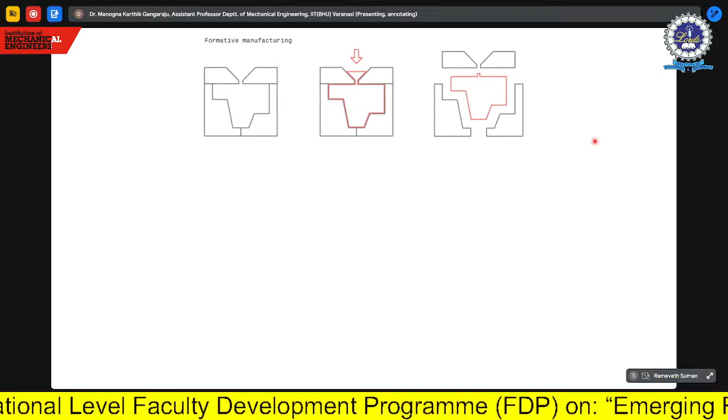This is what I am trying to say. This is formative manufacturing, like simple casting. You basically have a pattern, and that pattern will be the shape of the component you wanted. Then you melt your material and fill this pattern with that material because it is in a liquid state. This material will solidify and then you will have the final component. This is formative manufacturing, which is like casting.

Then you have subtractive manufacturing. If you wanted this shape, you can start with a block like this and then machine wherever it is required, and then you end up with this particular shape. The main disadvantage with this process is you are wasting all this material. You started with this block, removed all this material, and this is kind of subtracting material to achieve this particular component.

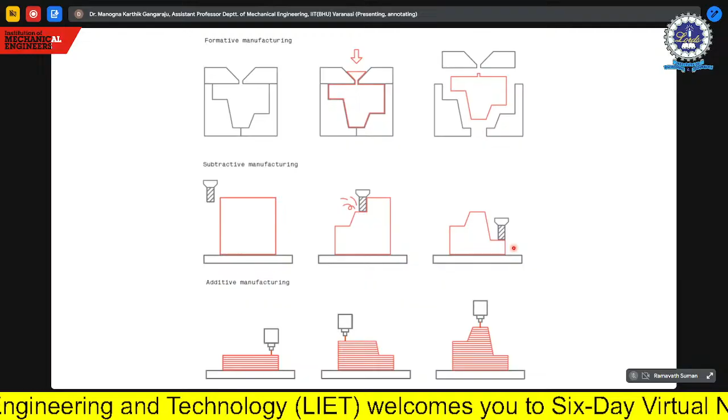And then here is additive manufacturing. If you wanted this shape, wherever material is required, you only deposit there. In this particular region you need material, so you only deposit there, and then till here you need material and you only deposit there, and then you want material only here, so you deposit here. We are actually developing this component by layer material addition at specific locations wherever material is required.

With this, you are able to develop complex shapes, and the main advantage with this technology is you don't have separate tooling. In casting, you need to make this mold, this pattern, and all the things required for casting has to be done. These are all separate tooling, not part of your component. This is a tool, this is a tool, this is your component, and to make it you need all these tools. Similarly in subtractive manufacturing, you need some machining cutting tool to make this, so there is also a tool involved.

But in additive manufacturing, you only require a deposition head. You are depositing material wherever it is required, and this is actually helping you fabricate complex near net shaped parts. If I wanted another shape other than this, I would need to make these tools separately, a different tool set for each shape I wanted to make.

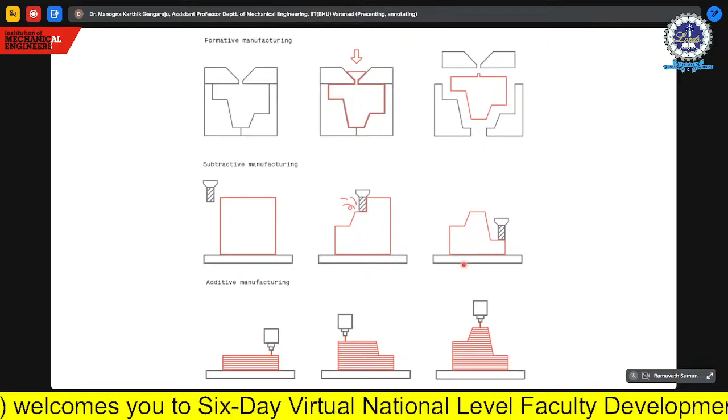Even in subtractive manufacturing, there are some things you can do with milling, some things with turning, some with grinding, some with super finishing and things like that. So different operations, different tooling.

But in additive manufacturing, it is agreed upon that you can make near net shaped components, so separate tooling or machining is not required. But the major disadvantage of this technology is you don't get the dimensional accuracy and surface finish requirements that you can achieve through machining. In machining, you get the best surface finish possible and the best dimensional tolerances that you wanted. But in additive manufacturing, you are not very close to this, you are better than formative manufacturing, but you are not very close to machining.

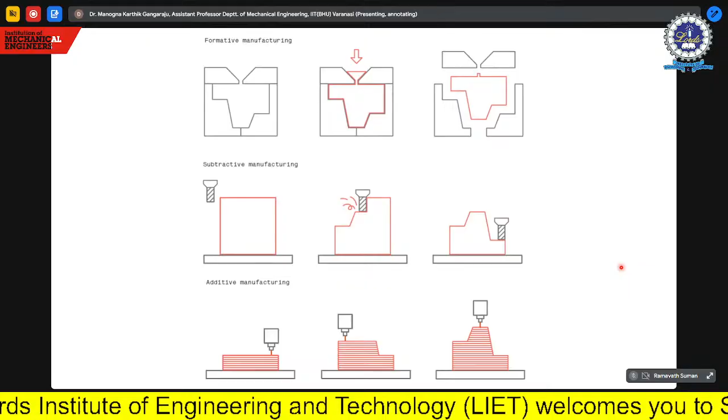So some post processing is required, and that is one direction where a lot of research is required, because you are already making a complex shape, and how to machine that complex shape if you wanted to improve the surface finish. So that is one of the disadvantages in additive manufacturing. Otherwise, you can form whichever shape you wanted, because there is no separate tooling specific for that process. Any shape you want, you can easily make since you don't have separate tool requirements.

So there are several technologies developed for additive manufacturing, from stereolithography, fused deposition modeling, 3D printing. This is the invention - the first invention was in 1981, invented in Japan by the Nagoya Municipal Industrial Research Institute. Subsequently, a significant number of processes evolved in additive manufacturing.

The initial three things are VAT photopolymerization, material extrusion, and material jetting - predominantly these technologies are used for polymers. And then you have technologies like direct energy deposition, powder bed fusion, sheet metal lamination - they are all used for metals.

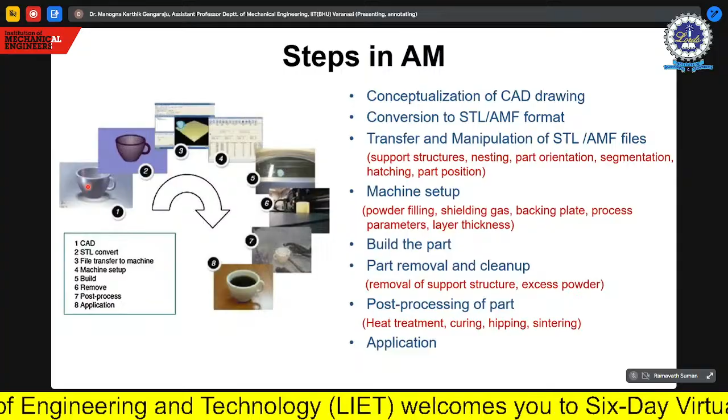I think most of you know, in additive manufacturing, initially you need the CAD model of the part that you wanted to print. If you wanted a shape of a cup, first you need a CAD drawing of this cup, and then this CAD drawing will be converted into an STL format. Basically, you are converting this model into surfaces.

So you are creating two surfaces - you are basically changing it into a surface, and each surface is indicated by several triangles. So this is STL format, and this particular format is what most additive manufacturing machines understand.

Then you upload your STL file to the machine, and then you do the machine setup - what process parameters to use, whether support structures are needed and things like that - and then you print the sample. Once you print the sample, you remove it, and then you do some post processing. I told you that some machine cleaning or some small machining might be required even in additive manufacturing, and then you get your final component. So these are the different steps involved, and what happens in each step is indicated here.

As I told you, I will introduce metal additive manufacturing technologies. Based on the raw material, let's assume I wanted to make a component of stainless steel - based on the morphology of the raw material I use, if I have stainless steel powder, then there are technologies based on powder. If I have stainless steel wire, then I have technologies based on wire. If I have stainless steel in the form of a sheet, then I have technologies for additive manufacturing for sheets.

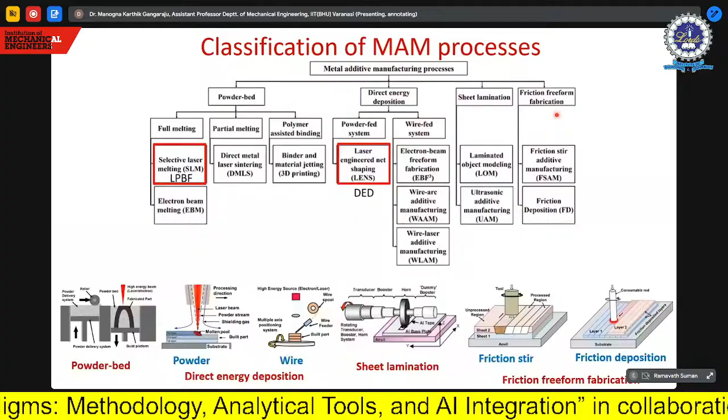And if I have it in the form of a plate, which is slightly thicker - like 3mm, 4mm thickness, whereas sheets are 0.1mm, 0.2mm, less than 0.5mm - in the case of plates, I am talking about more than a mm thickness. Then you have technologies for that. So based on how you take your raw material, you have to choose different metal additive manufacturing technologies.

Also, when you take powder, whether I am melting my powder completely when fabricating, then you have technologies which involve complete melting. And if I am not melting my powder fully, I am only melting the surface of my powder - when it is required, let's assume your powder has a very high melting point.

Your laser power or the heat source that you need to give to achieve the temperature will be very high. You need a very high power laser, so it is very expensive. So people thought, why can't I melt only the surface of this powder and then bond it?

So there are technologies which use partial melting, where only the surface of the powder gets melted, like in the case of very highly conductive materials like copper. If you have highly conductive material, it's very difficult to contain heat at that particular region because of the very high conductivity. So you will only end up with partial melting of this material if you don't have very high power lasers. But if you're using a very high power laser, then this is not a problem.

In some cases, you don't want to do any melting, because when you do melting and solidification, you have several residual stress related issues. So basically you have a powder and then you are applying some glue. Let us assume you are applying glue in a particular way. Only wherever the glue is applied, there the powder particles will be bonded. Other regions, the powder particles are not bonded.

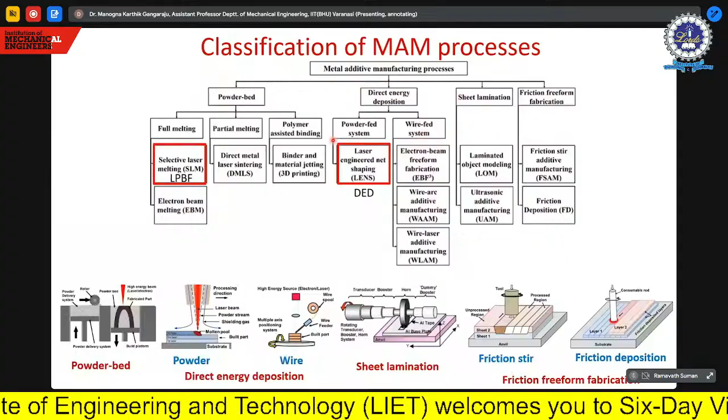So basically you use a binder, and this binder is applied in a specific way depending on how the component is. Like if the component is like a sphere, only the binder is applied as a circle. So wherever the binder is there, the material is bonded; the other regions, the powder is free. So these are the cases whether you melt it fully, partially, or you don't melt it at all. Based on that, you have different technologies involved. So these are different additive manufacturing technologies that we use.

So I'm not going too much into it. I'll try to give you some terminology, like how the metals, the components are printed. Although we call it layer by layer material addition, it is basically track by track.

You have one track of material deposited, and adjacent to these tracks, you have several tracks deposited next to each other. So when you are depositing one track adjacent to a previously deposited track, there should be an overlap between them. So this is your track one, let us assume. And when you are depositing another track adjacent to it, there should be some bonding between these two tracks, so there should be an overlap. Then only this region is bonded. Otherwise, there will always be some gap left over.

So the distance between two tracks is called hatch spacing, and it is very important to consider to get defect-free samples. So you deposit tracks next to each other, then you make a layer, and then you deposit layers one over the other to get a multi-layer structure, and then you end up having your component. So there is something called layer thickness. What should be this layer thickness, hatch spacing, and number of layers, and this is called tracks. So this is something that you need to understand.

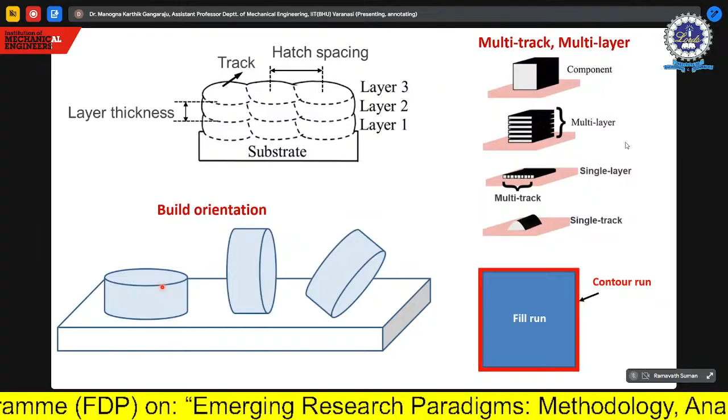And then there is something called build orientation. I have a cylinder. I can print it in this orientation, in this orientation, in this orientation. Each orientation has its own advantages and disadvantages, so we need to take care of which orientation I am using.

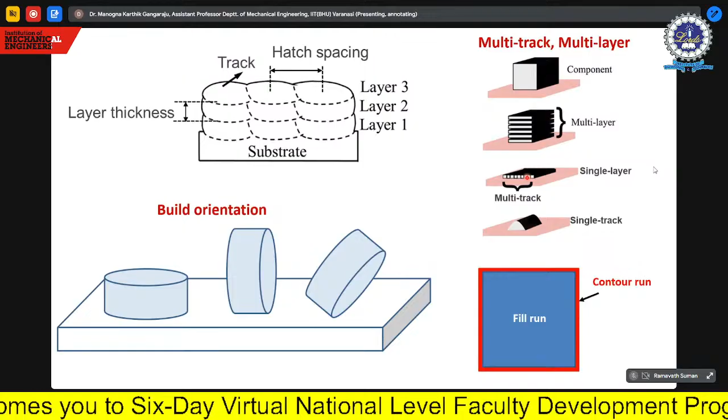So once I have one layer deposited, how am I making this layer? You have one track, you started from here, went here, and then again came back to the start position and then went here. So this is called unidirectional scanning. Or instead of that, I go like this, come back, go like this, come back, like a snake.

Okay, so this is a bidirectional pattern, or kind of a snake pattern. You started from here and then you entered, so this is your layer. How are you making this layer? Either you do it like this, or like this, or like this. You first deposit and scan these blue regions, and then you scan this red region. So then it becomes a layer, right?

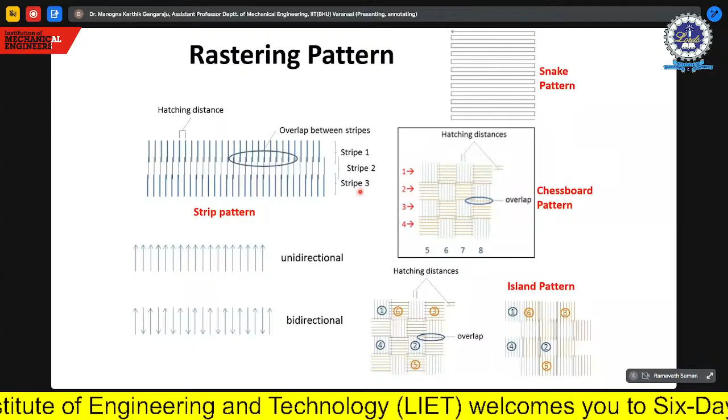So there is something called raster patterns - how you are scanning your layer. All these things matter because they determine how the residual stress pattern comes into your sample. So you have chessboard pattern, island pattern, and there is something called strip pattern. There are different patterns people use to avoid problems of residual stresses and things like that.

And then there is something called support structures in additive manufacturing. So when you have an overhang, let's assume this is your base plate at the bottom, and you've printed this particular part, and then you're trying to print this. If this angle is greater than 45 degrees from the surface, then you need something called support structures, because this region is away from the base plate and there is no support for it, so you need to give some support from the bottom, from the base plate, so that it can also be printed. So there is an overhang angle.

Based on the machine and the technology you are using, these overhang regions change. So normally for powder bed fusion technology, laser powder bed fusion technology, up to a 45-degree angle, you will be able to print without a support structure. But if the angle is greater than 45 degrees, then you need some support structures.

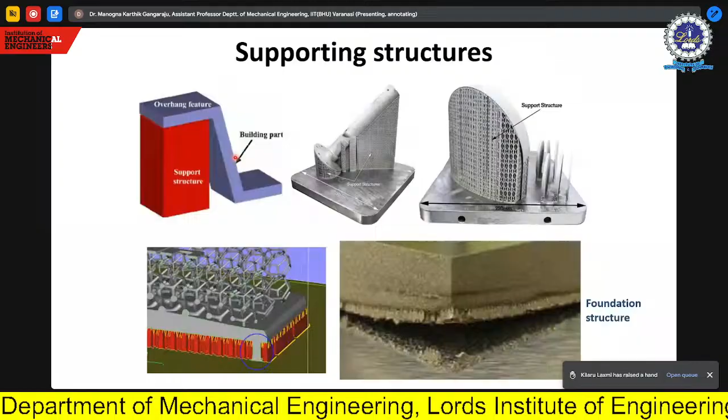Okay, so now I think you have a fairly good idea of the terminology in additive manufacturing. So I told you that if you wanted to make your raw material, first you need to make this raw material either in the form of a powder, wire, sheet, or plate. The most popular technology is powder-based technologies, because they give you better dimensional tolerances and things like that. In other technologies of additive manufacturing, making complex shapes is very tricky, but with powder-based technology, making components is reasonably easy.

So first, let's assume you have some stainless steel plate in your lab. First you need to make this stainless steel plate in the form of a powder. How do you do it? You use a technology called gas atomization. Basically you melt the plate, and once the material is melted, it's allowed to flow through a nozzle - these nozzle diameters are generally in the range of 1 mm, 2 mm. This liquid stream comes out, and you impinge this liquid stream with some gas, and then you achieve some powders.

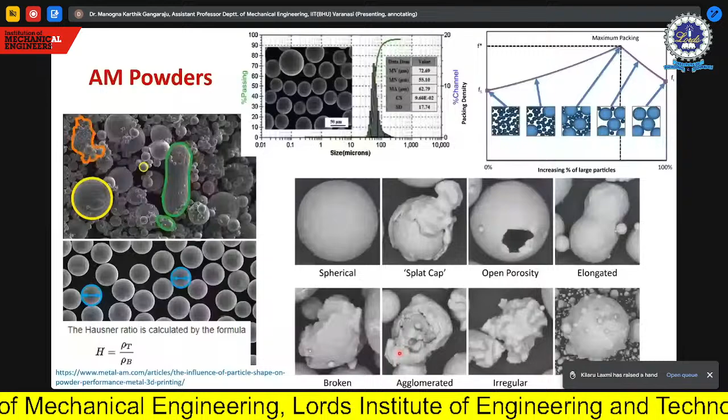I'm not going into detail, but what you need to remember is you need a powder in this particular morphology. When you do this technology, you basically get powders of all shapes and sizes, so we need to do some sieving to achieve these particular powders. This powder morphology will give you good flowability, because in additive manufacturing you need good flowability. There are some parameters used to check the flowability of the powder, something called Hausner ratio, Carr index, and angle of repose.

And each technology requires a particular size range of powders. So in powder bed technologies with laser, you have powders required in this particular size range. If it is electron beam, since we can use high power electron beams, you need powders in the range of 50 to 100, and in direct energy deposition you can use powders in the range of 80 to 150. So you basically require spherical powders in most additive manufacturing technologies. Other than this, metal injection molding, sintering and all - these are not additive manufacturing technology, but just for comparison.

So once you make your powders, then you do additive manufacturing. Once you have the powders, you want to do additive manufacturing of those powders, so you need to first optimize the process parameters. You have several process parameters like laser power, laser scan speed. As I told you, if you are using laser, then laser power matters.

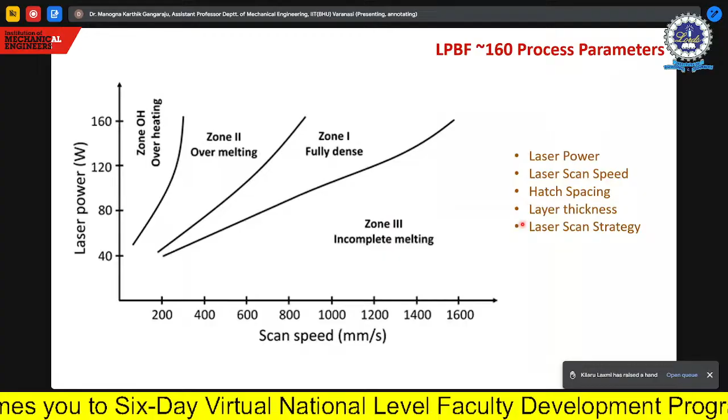So what people do is, normally they keep hatch spacing, layer thickness, and laser scan strategy constant. Generally they keep hatch spacing at a particular value - you generally maintain 30% overlap.

Let us assume your bead, the size of your track, is let us assume 100 microns - this is the track size you are able to achieve for a given power and scan strategy. Generally you maintain 30% overlap, so your overlap distance is generally 30%, ensuring you have a 30% overlap.

So this is a general rule for hatch spacing. It's not always the correct value, but it's a general recommendation. And generally the layer thickness is in the range of 40 to 50 microns - that's also what most people use for most materials. So you know this, and you keep it constant.

And for laser scan strategy, generally people do a 67-degree rotation with each layer, and use a bidirectional pattern. So you scan like this, come like this, and scan like this. Once one layer is developed, for the second layer you rotate the scan by 67 degrees, starting like this and then scanning like this.

So from the first layer to the second layer, there is a rotation of 67 degrees - you maintain this 67-degree rotation between the first layer and second layer. Why this is required is to control residual stresses and things like that.

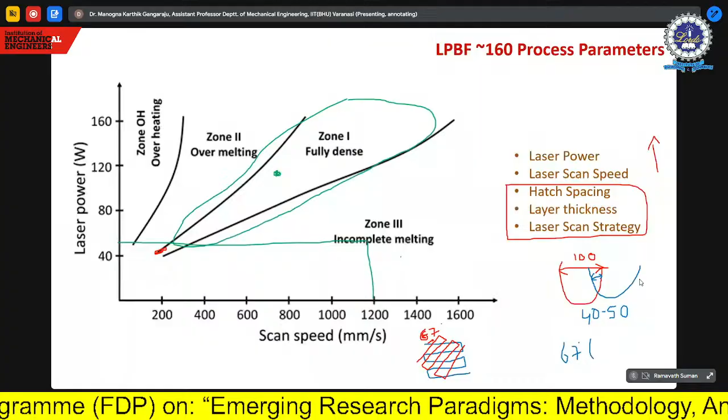So then you get these processing maps, basically telling you in this particular region you don't form defects. In this region, because you are at very low power and very high scan speed, you are not able to melt - the heat source is not very hot, or melting is not happening - so that's incomplete melting.

In this case, because you have very high power and very low scan speed, you are overheating - you stay at the same region for a very long time because your scan speed is low, so you end up having overheating. In this same region here also, up to a particular scan speed, you have overheating problems.

After a particular scan speed, when the scan speed is very high, reasonably high, then high powers will also result in good density.

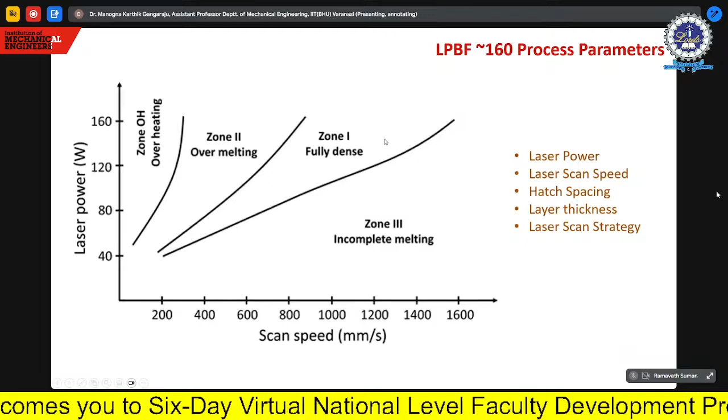So this is about processing maps. My work predominantly involves trying to optimize these parameters without doing experiments, because in additive manufacturing, these powders are very expensive and the availability of machines is also very difficult. So how to arrive at these optimum conditions is something we are looking into.

So what are we optimizing? We are trying to get rid of defects like gas porosity, lack of fusion, unfused powders, balling, delamination, warping, cracking, and things like that.

So we saw that there are several types of defects, and some of these defects can be controlled by process parameter optimization. But there are some defects which are material related, not process related. So for some materials, irrespective of whatever process parameters you use, you always have defects. This is one of the major problems in additive manufacturing.

Why is it a major problem in additive manufacturing? Because you are not melting the whole material at the same time. In additive manufacturing, you are actually melting a small region, and then again melting a small region, and again melting a small region. So there is localized melting in additive manufacturing. But in the case of casting, let us assume this is the shape of the component you want - you melt the whole material at one time and pour it.

So the way the material experiences thermal cycles in casting is significantly different from additive manufacturing. In additive manufacturing, the material is not experiencing heat at the same time. The material is experiencing heating, cooling, reheating. When you are depositing a particular layer track, you are reheating this particular track. So there is multiple remelting, and when you are melting, this region is remelted again. So you have several remeltings, several reheatings, and the material is also localizedly melted and solidified.

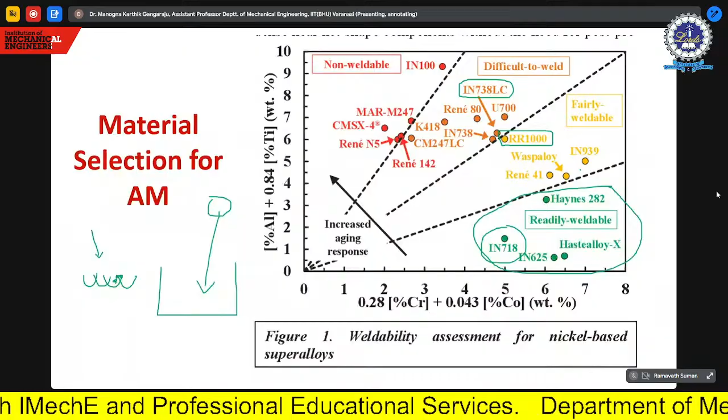But materials indicated here are very difficult to weld. If I wanted to do additive manufacturing of this material, it will be very difficult - you will always have some cracking. So these recommendations have to be followed. When you do process parameter optimization, remember it is not only the process parameters which matter, material selection is also important. If I select a very difficult to process material, additive manufacturing will create more problems. If I take a material which is easily weldable, then my process parameter optimization is also reasonably easy.

So now we saw how to make the raw material, and how to optimize the process parameters. I told you that material selection is also important when optimizing the parameters. Once you fabricate the part, there are some recommendations to achieve defect-free parts.

Like you want to maintain this L by D ratio, W by D ratio - these are some ratios given. These are general recommendations; they may not be true for all materials, but they will be true for most materials. Once you make the part, there is something called microstructure, but I'm not going into this now considering the time we have, so I will skip this part.

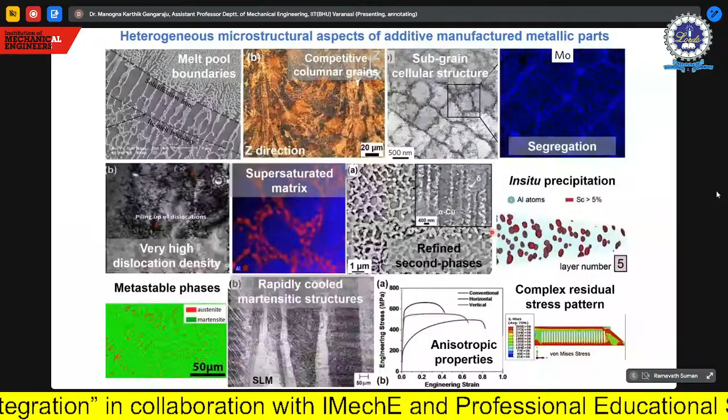Since additive manufacturing involves material deposited track by track, layer by layer, with several remelting and reheating cycles, when you compare the microstructure of a material fabricated by other routes to one fabricated by additive manufacturing, you see a significant difference. Because of this, you get significantly different mechanical properties.

It is important to study the mechanical properties. Let's assume material A is stainless steel, made through casting, machining, and similar routes. The same material produced through additive manufacturing will show significantly different microstructures if you check them.

The composition is the same, only the processing route is different. So whether you get the same properties or not is something that has to be evaluated, and a lot of research is going on in that direction. I'm not involved too much in that particular aspect, but I'll give you some ideas of where additive manufacturing is currently extensively used.

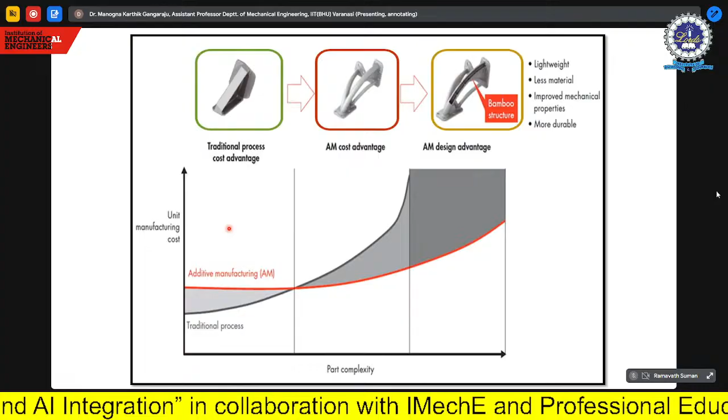One thing to remember is that additive manufacturing processes and technology are very expensive. So if I wanted to make a simple hinge like this, you should not use additive manufacturing, because it is not a cost-effective process for a simple design. Additive manufacturing will be costlier than traditional machining or casting.

But if I change this hinge design to something where I do some topology optimization, removing material wherever it's not required and keeping material wherever it is required, the design becomes a little more complex, and then additive manufacturing becomes cheaper than traditional manufacturing. If I wanted to manufacture this through machining, I might spend more money than with additive manufacturing.

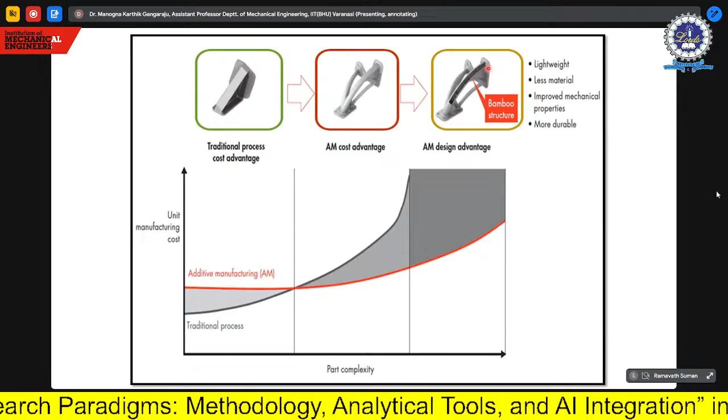If I make the design more complex, like turning this beam into a hollow beam with a lot of internal structure, conventional manufacturing cannot make it at all, and additive manufacturing is the only way. So additive manufacturing is a viable solution only when your design is complex. When the design is very simple, you should look for simple manufacturing methods instead. So based on the process and the component's design, whether additive manufacturing is viable or not is something people should understand.

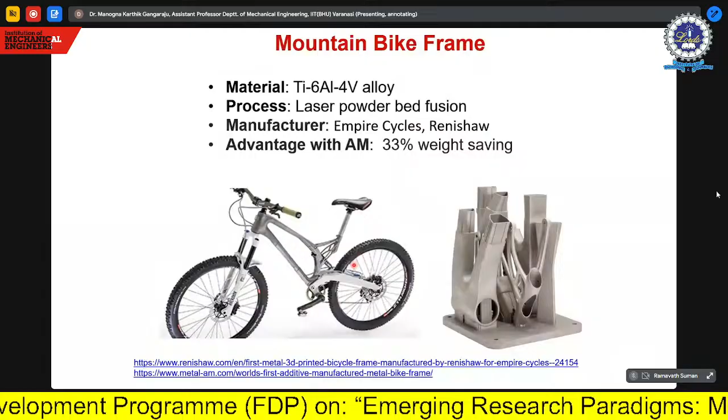People also look at manufacturing nodes for carbon fiber bikes, and rims for high speed bikes because speed and weight reduction are important criteria there. People also talk about fabricating exhaust walls, where at high speed, say a car going at 200 kilometers per hour, you need to exhaust gases from the engine at the same speed, so the exhaust system becomes very important. Additive manufactured exhaust systems are currently used.

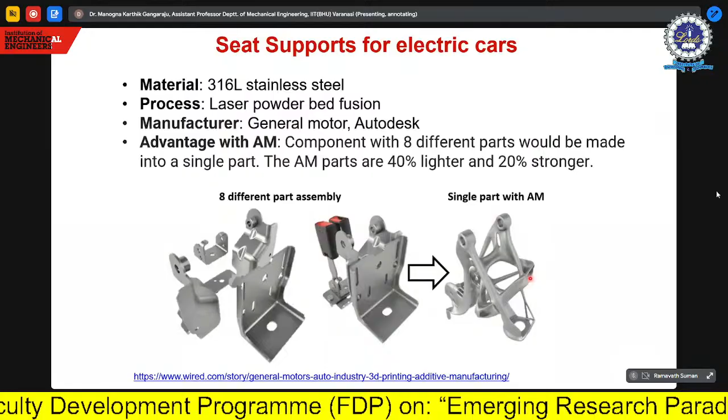People also look at reducing the number of assembly parts. Take a seat belt assembly, where you engage your seat belt - what we see is actually made up of 8 different components assembled into one. All the assembly time, sourcing from different suppliers, bringing them together and assembling, can instead be made in one shot, also reducing weight. There's a lot of interest in this, with reports of 40% lighter components, especially in the EV sector where weight reduction improves mileage.

There is a lot of prototyping. Most of these Indian companies, Maruti, Mahindra, all these people are extensively involved in this prototyping. And then if you wanted spare parts, let us assume there are classic cars of 1920s, 1930s, where you will get the spare parts now. So additive manufacturing again becomes an important tool.

So that is what I showed you, that peak of lot of investment in automotive is in these particular regions, and there is a lot of customization. You come up with your own design, people change it through additive manufacturing and give you, and there is a lot of interest in tooling also.

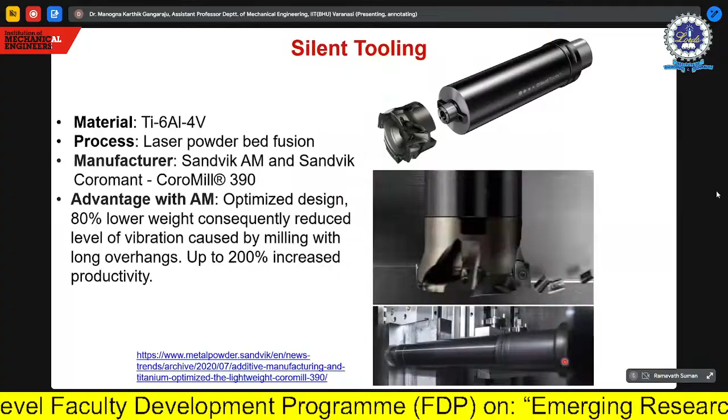People develop these titanium based tools. If you are doing some ram type boring machine, this is basically a boring machine. So this is your boring head or your machine head, and you are almost a meter away from the milling head. So there will be a lot of overhang and cantilever effects, and there will be a lot of chattering and sound. So people come up with these high strength titanium alloys, weight reduced alloys with these designs.

Sandvik is into this, and they are showing a 200% productivity improvement, conformal cooling channels, acoustics. A lot of interest into this acoustics domain also, where you can develop musical instruments through additive manufacturing, because you can play around with their shape, design, architecture. You can control the sound waves by changing the design and things like that. Okay, so these are some applications.

So I'll give you an idea what we are doing in AI/ML. Now you know fairly good idea about additive manufacturing, and there are a lot of applications in additive manufacturing. So I think if you would have come across AI/ML, the major problem for you in AI/ML is data.

Let us assume I have an X material. I wanted to optimize the process parameters of that X material. So if I wanted to optimize the process parameter, first I need data, like somebody has done with X parameters, they found defect. Y parameters, they found defect. Z parameters, they did not find defect. Or some other parameter, they found less defects, things like that. So you need a large data set of parameter and defect mapping.

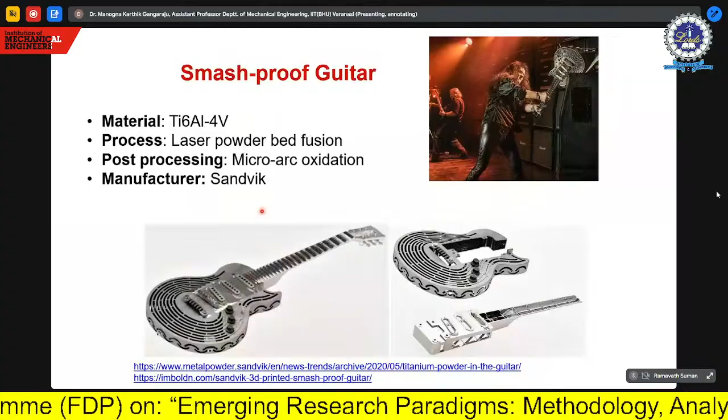So some data should be available for this parameter defect mapping. When you have this data available with you, then you can use different models and then try to get this information.

So what we did is we also did the same way. So we have taken TI64 material. So we could collect close to 180 literature data points. Okay, so we have collected data with respect to laser power, scan speed, and hatch spacing.

So what we did is any material or any report which says you have relative density 99.5, we consider that material as defect free without any defects. Any relative density less than 99.5, we thought it will have defects. So this is your data, with defects and without defects.

So we found a correlation between scan speed, laser power, and hatch spacing. So these are your pairwise plots which will give you relationship between them. And we see that there is a fairly good relationship between the scan speed and laser power. So whenever you have these, these relationships are important.

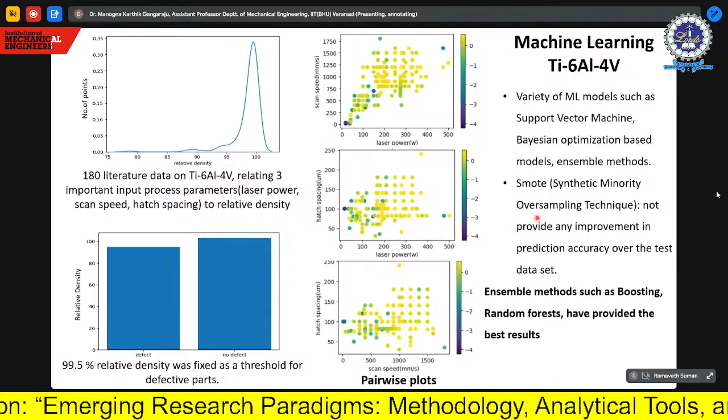Then we applied different ML models like support vector machine, Bayesian optimization based model, ensembling methods. Okay, and we also looked at the synthetic minority oversampling techniques. Okay, but most of these methods did not give us good predictions. Only ensembling methods, and then boosting and random forest methods actually provided us the best result.

So this problem can be solved only if you have a large data set. When my data set is very large, I can improve this algorithm further so that my accuracy improves further.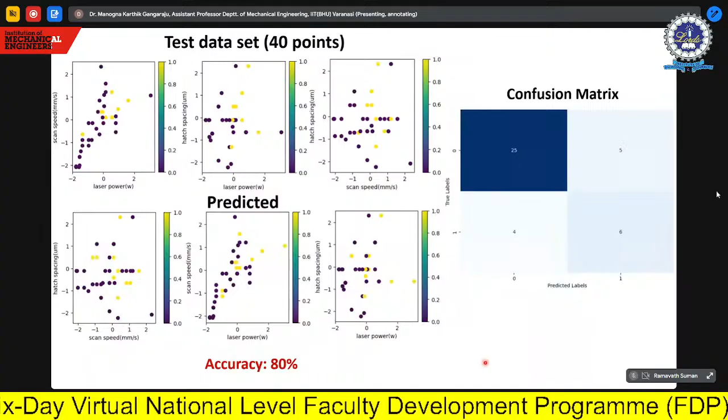Okay, but from where will I get this data set? If I wanted to do experiments to generate this data, I might be able to generate 30, 40, 50 points, not more than that, because it's a huge resource and money involved.

So what we thought of doing is using some simulation tools. We started developing thermodynamic simulations with a software called ThermoCalc, to simulate the additive manufacturing process we are doing. We used two different processes: one is ThermoCalc and another is AM Pravah. Using these two technologies, we do single track experiments.

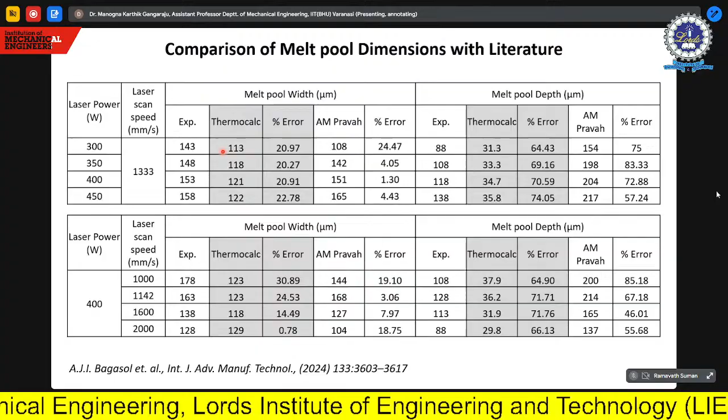Basically we are trying to measure the bead width and depth, and checking whether the softwares also predict my bead width and depth with respect to experiments. So these are your experimental data and these are your software information. We are getting close to 20% error with respect to width in both softwares, but in the case of depth, we have a very high error, close to 60%, in both these softwares.

So currently we are optimizing this software so that we come very close to the experimental data. Once we do this calibration, the software can actually generate these processing maps. So I can use this software to generate the processing map with different laser power and laser scan speed, and once I know my software is predicting very close to the experimental data, then I can believe these processing maps.

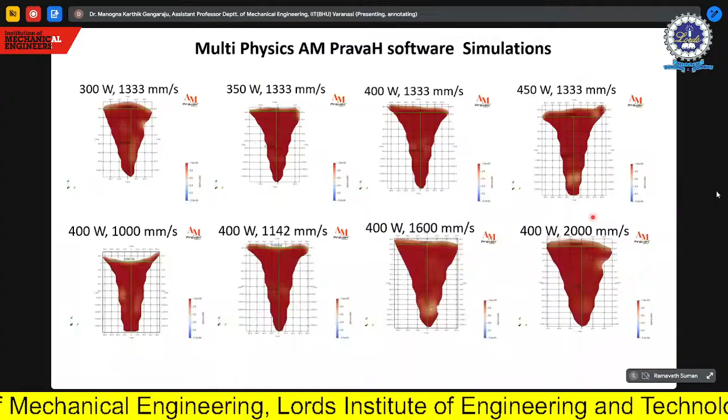Once you have this processing map, you can get a large data set from it, from the software data, and this can be used for ML. So we do these experiments, and then use this data for my machine learning algorithm optimization. Once I optimize this ML algorithm, I can predict the exact optimum conditions for my material.

And it's important to remember this is specific to a particular material. If you change the material, then this procedure has to be followed again for that particular material. So these are some simulations we have done, showing you how we get these additive manufacturing simulations to get this data. So this is one aspect where we are working.

Then I told you there is always a need of developing high strength materials, and that there are infinite possible combinations to get these high strength materials. So what we have done is collect a large data set of whatever is available. Ultra high strength steels have yield strength greater than 1500 megapascal. When the yield strength of your material is greater than 1500 megapascal, you call them ultra high strength material. We collected data for close to 180 material combinations, and then did model training.

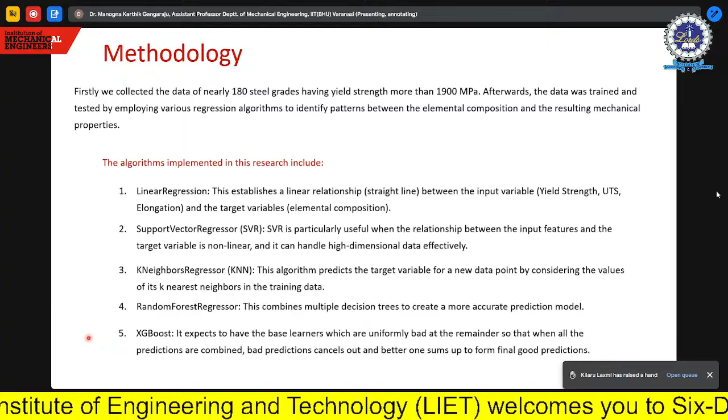We used different algorithms: linear regression, support vector regression, k-neighbor regression, random forest regression, and XGBoost. So we have several data sets. When we collected data for more than 1900 megapascal yield strength, we took close to 180 data sets.

The whole idea is you need composition - which composition of my material will give me yield strength greater than 1900 is what we wanted. So the model is developed to predict which composition will give us this. We collected all this data, and saw that there are some elements which are mandatory or definitely required to achieve that. So we did this mapping of different elements and their requirements.

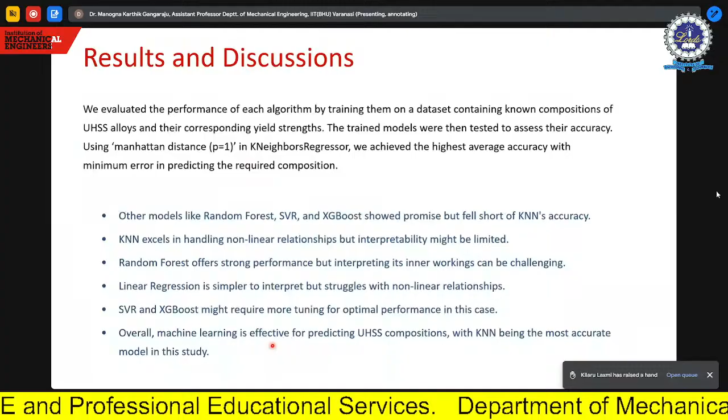Our observations are that we were able to develop this model, and with the model we were able to get some composition. To validate whether my machine learning model's achieved composition really gives this experimental data, we actually developed this composition targeting yield strength greater than 1900 megapascal and elongation 10%. This is our target, but we will see how we are able to achieve it.

So we melted this material, developed it, did some microstructural analysis, and we have hardness values here. Since the material we developed is very small, we could only do a hardness survey. The melted material has hardness close to 600 Vickers hardness.

So there is a simple thumb rule that yield strength is generally 3 times its hardness. So if you see, we are coming close to 1900 megapascal of strength that we want. It's an ongoing work, all these works that I showed you, I just wanted to give you some ideas where we can use machine learning and then validate the data, whether we get these parameters or not.

So this is all about my content. I'll stop here, and if you have any questions, maybe you can ask.

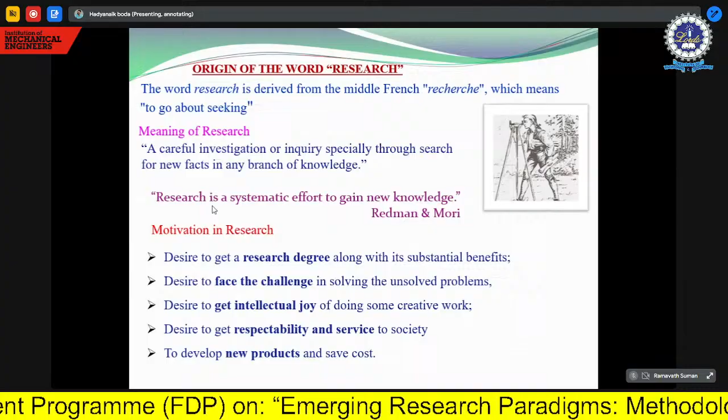In any branch, if you go for mechanical engineering, we have thermal design and production. Especially for research related to refrigeration and air conditioning, you should have knowledge of psychrometry, the various environmental issues, relative humidity, and other psychrometric problems. To design an air conditioning system, we know it involves simultaneous control of temperature, humidity, cleanliness of air, and purity of air. Based on the region and space, whether central India or coastal area, we have to find the solution for a particular region so that we can optimize comfort conditions. I am talking about that example related to refrigeration and air conditioning.

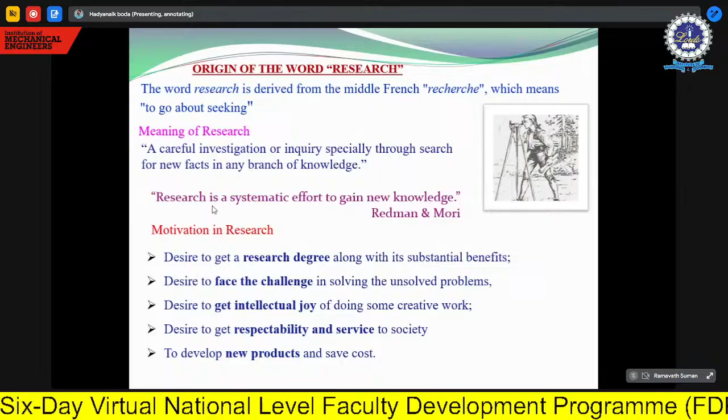Now, what is the motivation in research? What will a student, scholar, or general industry ultimately get benefited from this research? First, the desire to get a research degree along with substantial benefit. Second, the desire to face the challenge of solving unsolved problems. Third, the desire to get intellectual joy of doing creative work, and the desire to get respectability and service to society. Also, to develop new products and save cost. These are the motivations for good research.

Now let's look at the types of research. Starting from basic research, on the basis of methodology it has been divided into pure research, applied research, exploratory research, descriptive research, and theoretical, empirical, and qualitative research. It has been classified into 4 types.

Now coming to fundamental and applied research. Fundamental research is only about gathering knowledge for knowledge's sake, only to understand phenomena related to pure mathematics, which is an example of fundamental research.

Applied or action plan related research aims to find a solution for the immediate problem facing a society or industry. So the problem facing the industry should be found out by applying that particular approach, which comes under applied research.

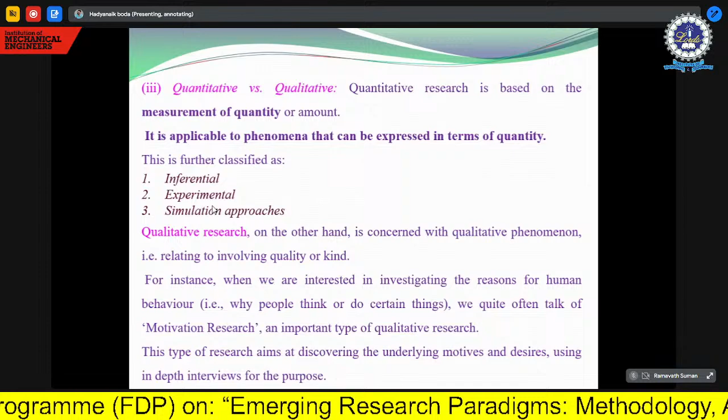There is also descriptive analytical research, so four categories: quantitative and qualitative research. Qualitative research is concerned with the quality phenomena, and quantitative research is concerned with measurement of the quantity or amount. It has been further categorized into three: inferential, experimental, and simulation approach. Regarding experimental and simulation approaches, we will discuss them in a subsequent slide.

There is comparison of various quantitative and qualitative research, and then significance of research - what ultimately this research signifies.

One is that research provides the basis for nearly all government policies in our economic system. Suppose the government of Telangana wishes to give any monetary benefit or family related benefit - they will consider demographic numbers, the number of males and females, and based on age they will categorize, so that will indirectly benefit society. So the first research significance is providing the basis for government policies to implement any policy - so the data should be there, and data collection and optimization of data plays a very important role.

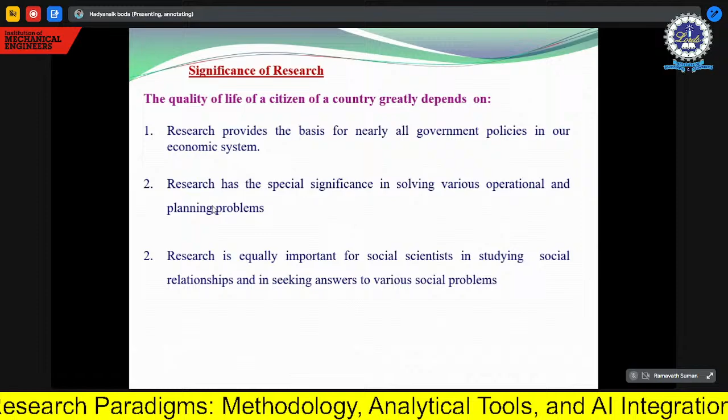Second, research has special significance in solving various operational and planning problems - mostly related to solving problems relevant to industry as a whole. Research is equally important for social scientists in studying social relationships and seeking answers to various social problems.

Then research methods and research methodology. So far we have discussed what is research and what are the various types of research. Next is the research method.

Research methods are the tools and techniques - what sort of tool or simulation tool is used for that particular research, and what sort of techniques are used to generate and gather data - that is called research methods.

Methodology is different. It is the systematic plan and procedure to solve the problem, step by step procedural steps to adopt and come to the conclusion - that is research methodology. So method is nothing but the tools and techniques used, and methodology is the plan and procedure to be adopted to find the solution for a particular problem.

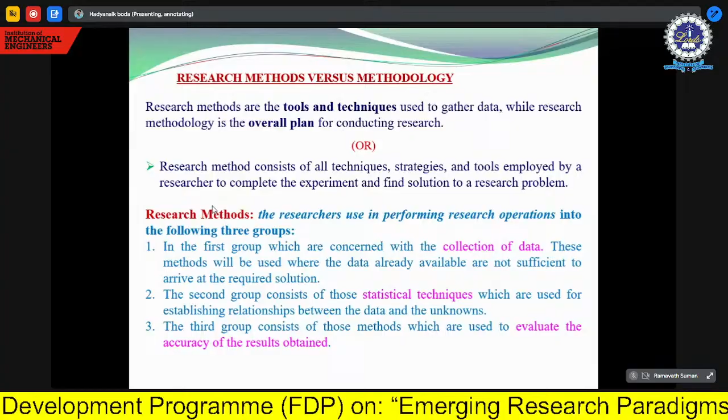Under this research method, researchers use performing research operations divided into three groups. The first group is concerned with data collection, and the statistical techniques used and evaluating accuracy of the result obtained.

Next is the research method used for the conduct of the research - various sources are there. You can go for library research and the research field, non-participant direct observations, participant observation, mass observation, mail questionnaires, group interviews, and telephone survey.

Research methodology, as we just discussed, is the systematic technique, plan, and procedure used to identify and analyze information regarding the specific research topic. Why is research methodology important? Because it provides the framework and guidelines for researchers to clearly define research questions, hypotheses, and objectives.

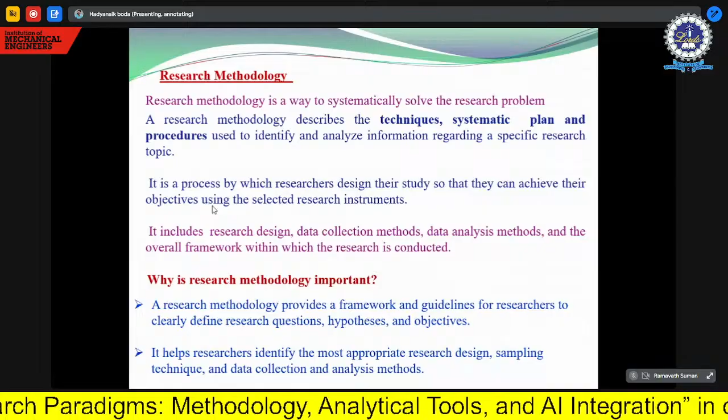Suppose after getting the gaps in the literature review, then the third chapter comes, the research methodology, where you have to define the problem statement and the objectives. So what would the objective generally be - to analyze, to investigate, to compare - like that you have to state your objectives. So that really gives the framework and guidelines for the researchers.

Second, it helps researchers identify the most appropriate research design, sampling technique, and data collection and analysis method.

Then the research process, steps 1 to 7. The first is define the research problem. Second, review concepts and theories, and review previous research findings - that is step 2. Then after the review step, you have to formulate the hypothesis. The fourth stage is design research, which includes sampling design and collection of data, then analysis of that data which you have collected, and then interpret or prepare a report.

So then you have the feedback and feed forward as well. Based on that analysis, you can reconsider the parameters which are influencing a particular approach, reconsider that particular variable, and then obtain your results for the validation.

Then the criteria of good research. The purpose of the research should be precisely defined. The research procedure used should be described in sufficient detail, keeping the continuity of further studies. That's what in a journal paper we generally do.

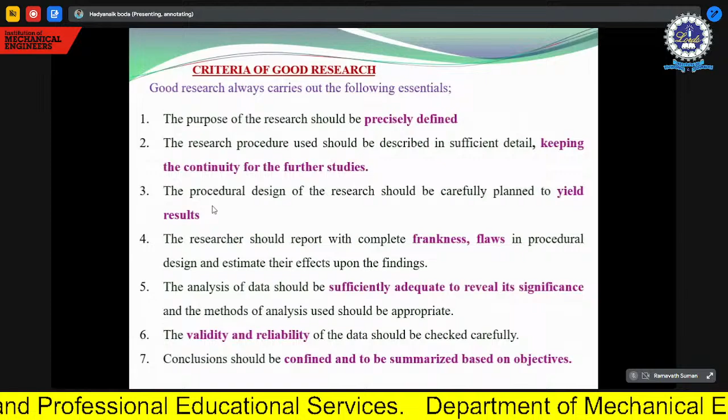A research scholar or author who publishes a paper, first we see the abstract, then what methodology he has adopted, and ultimately we go to the conclusions he has made. Based on that, that becomes the future scope for our problem. So understanding the abstract, following the methodology, and understanding the conclusion of what the previous researcher has done is more important.

Coming to the third point, the procedural design of the research should be carefully planned to yield the results. The researcher should report with complete frankness the flaws in the procedural design and estimate their effects upon the findings. The analysis of data should be sufficiently adequate to reveal its significance. The validity and reliability of the data should be checked carefully. Conclusions should be confined and summarized based on the objectives.

In general, in three words I can say you can finish your research task, that is GOC. First, G means gap identification, which we generally find through the literature survey. At the end of the literature survey, we can come to the conclusion about what are the gaps.

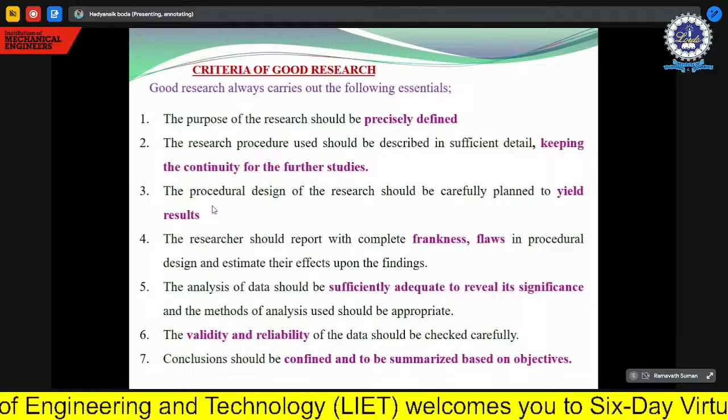Why? Because at the end you have to compare your work with other researchers, whether it is experimental or simulated. So validation is a much more important priority to be given by any researcher. And coming to the last one, drawing the conclusions.

The major limitations in conducting research are time, cost, and access to resources. Many researchers face difficulties because resource availability is a bigger problem. Then approval by the authorities, ethical concerns are also very important parameters, and then expertise.

And then the necessity of defining the problem. Just now we discussed that at the end of the literature review, at the very beginning of the research methodology chapter, you have to formulate your problem. That is problem formulation, also called a problem statement.

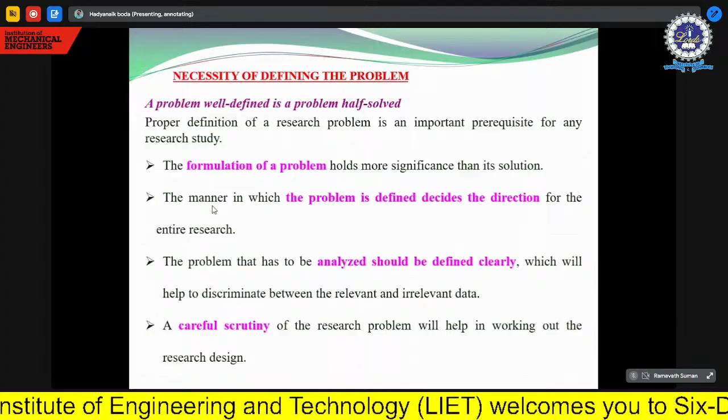You have to define it, just like in the labs we generally conduct. Suppose if you go for the third or fourth semester, the IC engines are there. What is the problem formulation for that? That is nothing but the aim. How do you define the aim of that particular experiment? The aim of this study, or the aim of this compression ignition engine, is to investigate the performance parameters of that engine.

Then what would be the performance parameters? You talk about the efficiency of the engine: mechanical efficiency, isothermal efficiency, adiabatic efficiency. Thermal efficiency plays a very important role. Then the mass of fuel consumption. Like that, you have to define the problem or problem formulation.

The manner in which the problem is defined decides the direction of the entire research. The problem that has to be analyzed should be defined clearly. A careful scrutiny of the research problem will help in working out the research design. So defining the problem plays a very important role in the methodology section.

Then a lot of questions may arise during the course of research: what sort of data to be collected, what characteristics of the data are relevant and need to be studied, what relations have to be explored, what techniques have to be used for this purpose. So data collection plays a very important role for us.

It is not a big task like social sciences research, especially if you come to mechanical engineering. Then how do you collect the data for refrigeration and air conditioning?

So if you think about comfort conditions, you have to consider the number of persons sitting in the hall. Based on that, the heat generated by each person, what is the air velocity required, and what is the tonnage of the particular room required. Based on that, the operating temperature and pressure required and relative humidity.

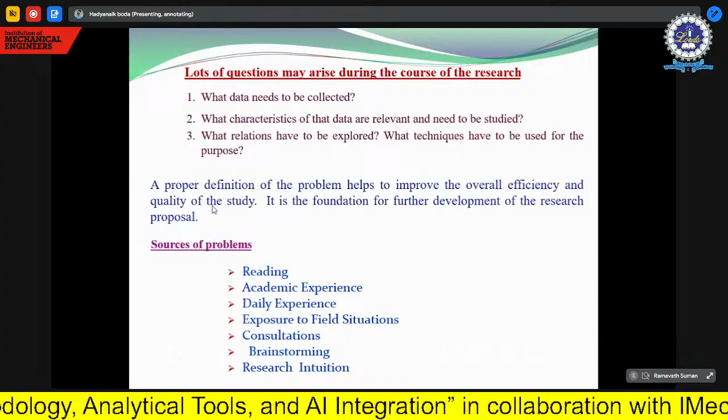Already we have discussed what is air conditioning. It is a simultaneous control of 4 parameters: temperature, humidity, cleanliness of air, and velocity of air. So data is needed. Until and unless you have data, we cannot predict the required temperature.

So let me ask, what do you mean by comfort in general in an air conditioning system? What do you mean by comfort? Anybody, what do you mean by comfort?

I think all of the participants are mechanical engineering only. Hello, can you hear me, anyone? Yes sir. But most of them are mechanical, sir. Some are from other departments.

It's okay. Then now I'll define what is comfort air conditioning. It is nothing but the state of mind which expresses satisfaction towards the thermal environment. For designing an air conditioning system, the state of mind which expresses satisfaction towards the thermal environment. The name itself, thermal environment, gives the 4 parameters: temperature, humidity, cleanliness of air, and the flow of air.

So many questions may arise during the course of the research: what sort of data is required to analyze the problem, what characteristics of the data are relevant and needed to be studied, and what relations have to be explored.

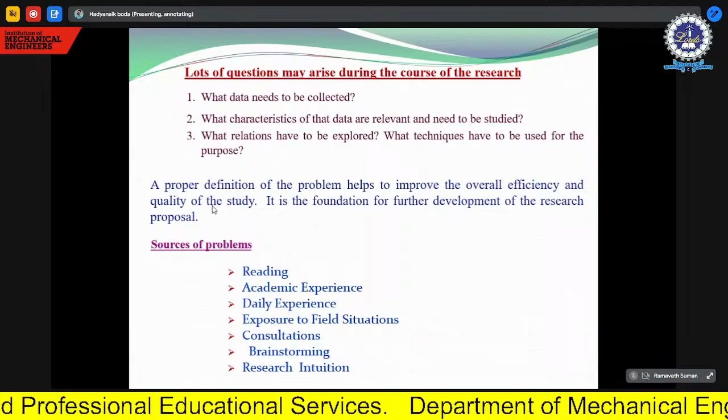There is a relation, suppose if you consider sensible heating and sensible cooling. You cannot do at a time all the sensible heating, cooling, humidification, and dehumidification. So a step by step procedure has to be adopted to get the comfort condition. This type of data is required for analysis.

So these are the techniques involved in defining the problem: the statement of the problem in a general way, understanding the nature of the problem. We must understand the nature of the problem first, and then survey the available literature.

So chapter 2, which we have discussed, is the deciding chapter, where a researcher can identify the gaps. That's what surveying the available literature is for; it plays a very crucial role for researchers.

Developing ideas through discussions. So while interacting, just now I posed a question. What was the question? What do you mean by comfort condition? Like that, through interaction, you will immediately think.

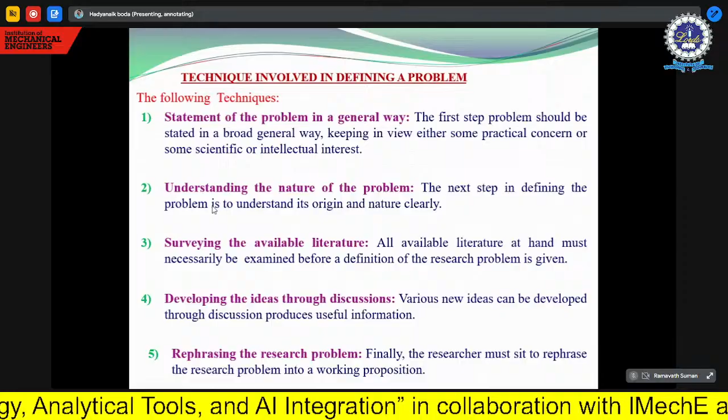So sir is asking about comfort. What is comfort? Comfort in terms of the environment, comfort in terms of money, comfort in terms of the family, all important parameters. But your research is in the design of air conditioning systems, so your focus would be on designing the parameters of the air conditioning system.

That's it, and other relevant techniques also apply here. Fifth one: finally the researcher must sit and discuss the parameters which are involved.

Then the experimental design. As per the title which I have given, the experimental design I am going to discuss in subsequent second and third sections. The design is nothing but the tools and techniques required to solve the problem—what sort of tool and what sort of technique the researcher is going to adopt. That's what we are going to discuss here.

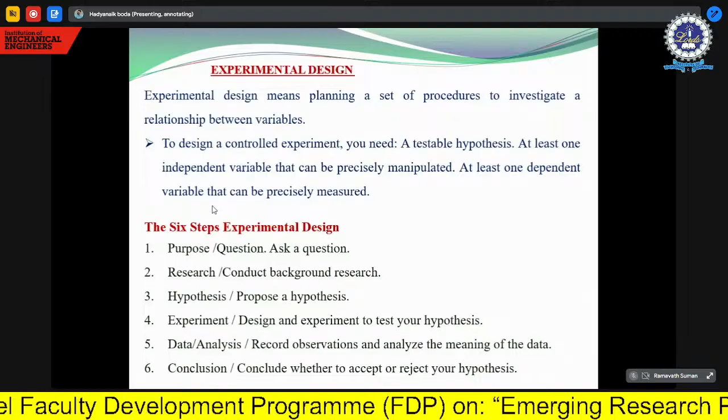Features of good research design include flexibility, economic efficiency, minimization of bias, maximization of reliability of the data collected, realism, and a design which gives the smallest experimental error.

It should not involve error greater than plus or minus 0.001. Then studies related to the objective and nature of the research problem must all be considered while preparing the research design.

So then the types of research design: you have exploratory, descriptive, and hypothesis type. Then next, the characteristics of the research design are also there.

You just understand the basic characteristics, and then problems encountered in research in India. First one is the lack of scientific training. Most researchers don't know the methodology, how to carry out research, or the scientific training is lacking. Second one is insufficient interactions.

Most researchers always feel that they don't know what to do, and they themselves get bothered a lot because of the lack of interaction with other researchers or higher professors or any required source, they are unable to interact with them. Then there's need for generating confidence, overlapping issues, and library management is also very poor in India. So those are the problems encountered by researchers in India.

So the first part is what we have just discussed. If you quickly review that topic, what we have discussed in the first one is the basic introduction of research methodology, types of research methodology, significance of research methodology, difference between research methods and research methodology, other problems, and the formulation of the problem. So these are the topics we have covered.

And then next, coming to the structure of the thesis. Suppose you are well aware of the collection of data, analysis of data, and then you want to write a thesis, then how should it be structured?

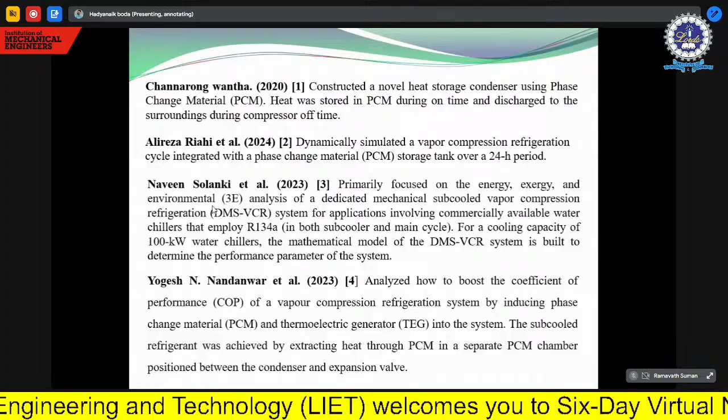So gap identification is very important. Then writing the literature review, you should not write all the authors' names in the literature review. Only the first author's name followed by year or number, whichever you feel comfortable with, though it's better to go with the number.

And second one, suppose if you see here, number two, that is Alireza Riahi et al. What do you mean by et al? If there are more than 2 authors, you need to mention et al. If it's a single author, only the first name and then the number, that's it.

So for more than 2 authors, you need to mention 'et al.' That's how you should nomenclature the literature review section or chapter.

Then gaps identification. As already discussed, identifying the gaps plays a very important role. It gives a futuristic understanding of what sort of problem you need to carry out identification on. At least 3 gaps you have to mention.

So how it should be: many researchers focus on the simulation model, and there is a lack of experimentation. Because conducting experimentation involves a lot of cost and time, many researchers generally go for the simulation approach. So we cannot always depend on the simulation approach; it is better to conduct experimental work.

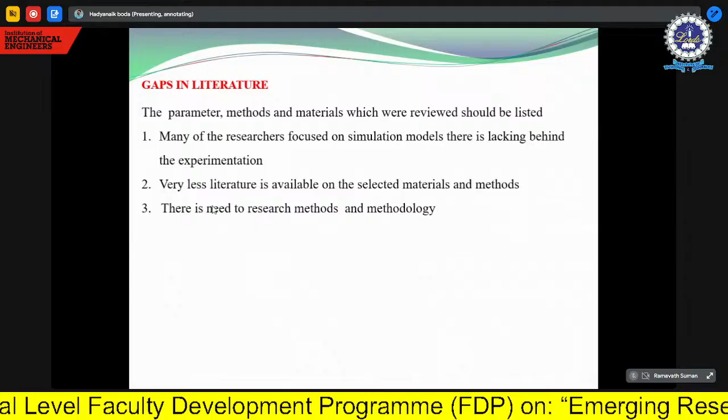So if you wish to conduct experimentation, you highlight that many researchers focused on simulation. Since they have done simulation with the same parameters, you mention that you are going to investigate experimentally.

Then second, very less literature is available on the selected materials and methods. This is very important. The previous researcher may have considered some materials, but that material may not suit a particular application. So you can reconsider, and mention that very less literature is available on the selected materials and methods, along with what method they followed.

And there is a need for research methods and methodology. Whatever methodology they have followed, you can highlight in this particular section in chapter 2, especially the gaps identification.

Then the methodology, as discussed, chapter 3 methodology, the problem statement. First, the problem statement should be a concise and accurate explanation of the problem that a study aims to address. It points out the gap between the desired and actual state and emphasizes the necessity of conducting research to bridge this gap.

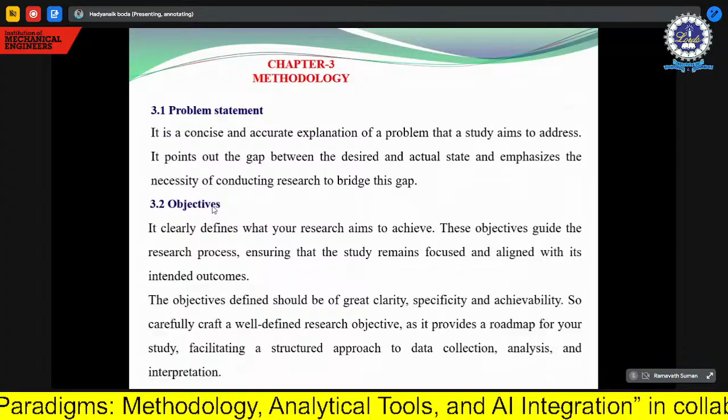In a simple way, the problem formulation or problem statement should not exceed more than 3 lines. Suppose my research is in refrigeration and air conditioning, to evaluate the performance of the air conditioning system. How should I formulate the problem statement? The aim of this research is the experimental investigation of the vapor compression refrigeration system to enhance the system performance. That's it - like that you can formulate your problem.

So I have formulated the problem: system performance improvement. Then, to improve the system performance, what should be the objective? First, I have to fabricate the vapor compression refrigeration system for a split air conditioning system, meaning I need to take care of indoor and outdoor conditions. The next one is to analyze the refrigerant properties, considering the thermodynamic and transport properties of the refrigerant. We will discuss particular objectives like this in the case study.

Then the research flow chart. This flow chart shows what the researcher is going to do in sequential steps, starting from what we discussed - abstract, introduction, literature review. Then I carry out the simulation study, and experimentation also. Both should be compared - that is nothing but validation.

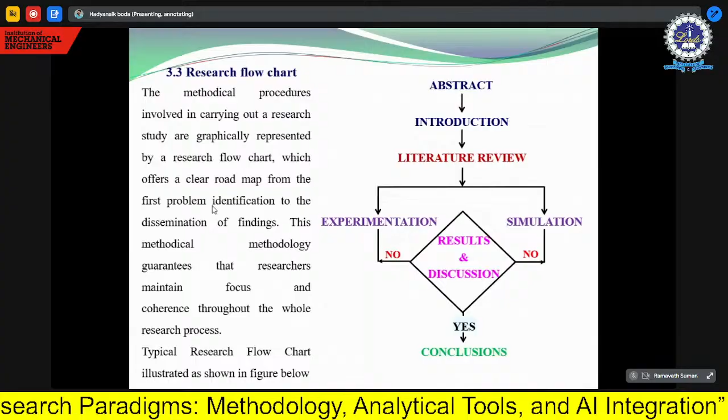If the validation between simulation and experimental is within 5 to 10%, that is acceptable, and I can go for the conclusion; otherwise I need to reconsider. Feedback is given for experimentation and simulation, and I need to re-exercise that particular parameter. Suppose I have given a very high mass flow rate.

If the mass flow rate is very high, the compressor work is more, and the COP will be reduced. So what do I need to do? I need to regulate the mass flow rate so that the work of compression can be reduced. So by reconsidering, a feedback system should be given so the experimentation can be carried out with less error, and the validation between experimental and simulation should be within the range of 5 to 10%, which is acceptable. This is the experimental procedure.

Next, in the case study we will discuss the results and discussion chapter, which is chapter 4, and chapter 5 is the conclusion and scope for future work.

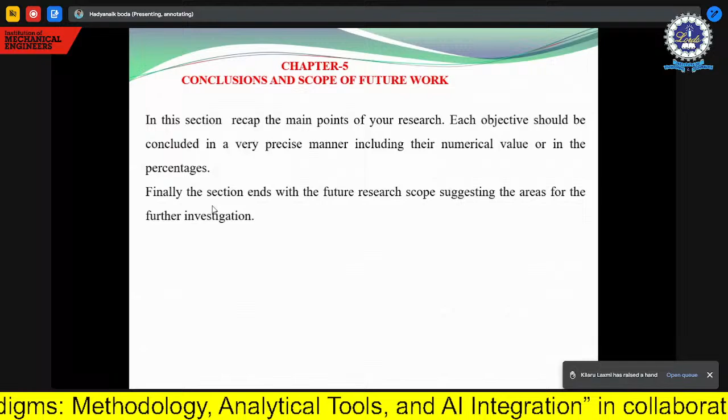After the results and discussion chapter is over, you immediately move to the conclusion chapter, where you mention the highlighted results based on the objectives. Suppose you have fixed four objectives mentioned in the methodology chapter, then how many conclusions should you draw?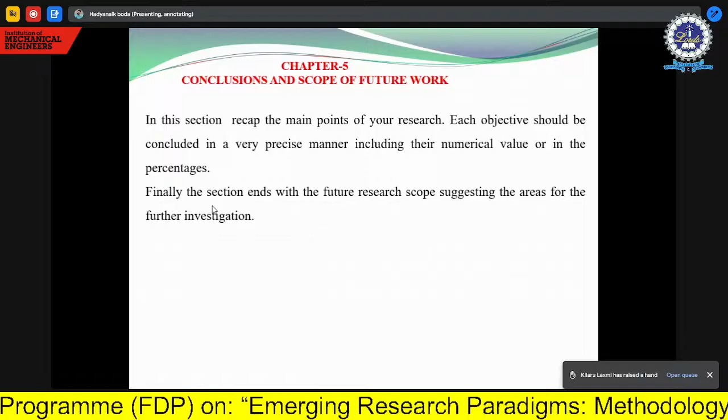Then at the end of the highlighted conclusions, you must mention the scope of future work. Suppose you have worked on a particular refrigerant, that will be compared with other refrigerants. Since the work has been limited to only R32 refrigerant, any other refrigerant with low global warming potential and low ozone depletion potential may be used. Also, since this research has been carried out only through simulation, the work may be further carried out for experimentation as well. That's how you mention the future scope of work.

Next, the references - very important references you need to mention. If you have a pen or notebook, write this down: reference should always be numbered, square bracket 1, followed by A for author, then Y for year, then T for title of the paper - AYT - then J for journal name, and then VIP - volume, issue, page number. That's the pro forma you can use.

If you see here, first the square bracket, then the author name, Chanarong Wantha, author, followed by year. Then in inverted commas, the title: experimental investigation of the influence of the thermoelectric subcooler. Then the journal it's published in, applied thermal engineering - that's the J for journal name. Volume 180, issue 115829, and then the page number. You need not mention the ISSN number. This is the format for writing references.

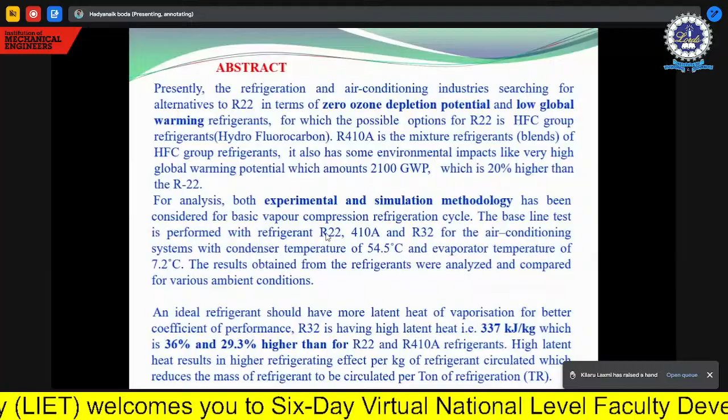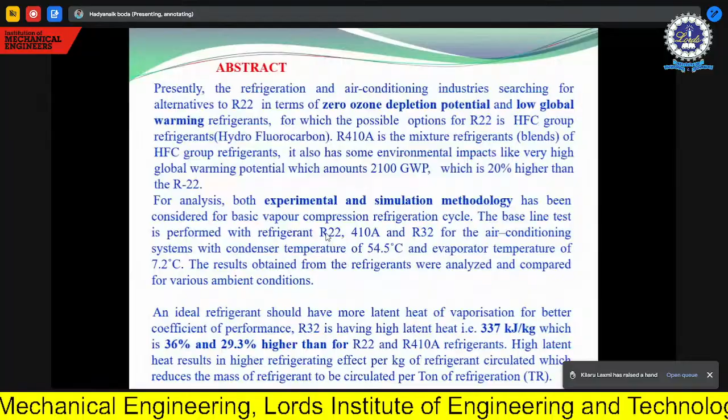So what does this mean? This abstract itself describes the research work related to refrigeration air conditioning, particularly how R22 refrigerant needs to be eliminated from the vapor compression system due to environmental issues, and other alternatives are being searched for. For that, experimentation and simulation methodology has been adopted - you can see here the IMR format.

IMR - basic introduction, then methodology, then sample results - you can see it's organized in three paragraphs. The introduction covers what an air conditioning system is, the various refrigerants and their types, the basic components involved, ODS reduction, and comparison of properties - that's the basic introduction we already discussed. It should not exceed the range of 8 to 12.

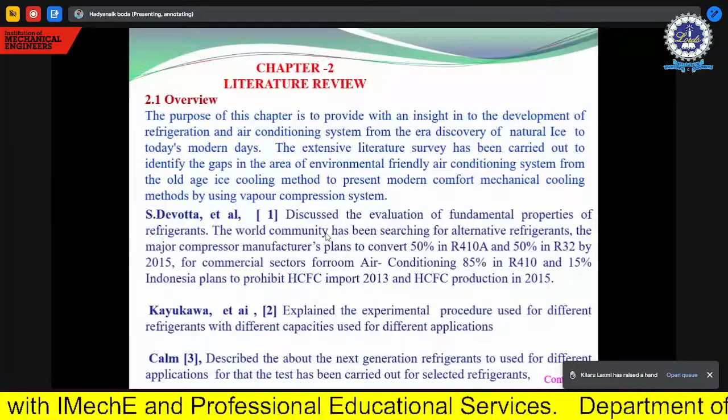Then coming to the literature review - we've already discussed this. You can see the orientation of the literature review: the purpose of this chapter is to provide insight into the development of refrigeration and air conditioning systems, from the era of discovery of natural ice to today's modern days. An overview is written, followed by previous researchers' explanations, their experimentation and observations described in the form of quantitative and qualitative presentation.

And then the problem formulation, as we have discussed the problem statement. The aim of this research work is experimental investigation and performance comparison of zero ODP HFC hydrofluorocarbon group refrigerant in an air conditioning system. Simple statement. That itself gives clarity for the experts who are going to review your work.

And then objectives. Objectives always start with 'to' statements. What is that? To investigate, to compare, and then to analyze, to validate, to model. Like that you have to mention.

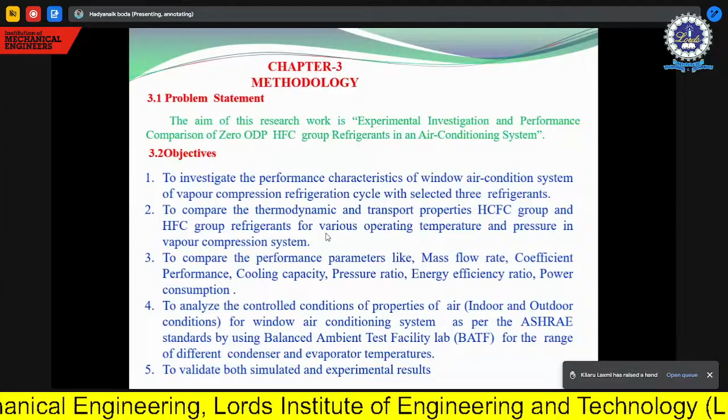So the first objective: to investigate the performance characteristics of the window air conditioning system of a vapor compression refrigeration cycle with the selected 3 refrigerants. So this particular research carries out the performance investigation with 3 refrigerants on a window air conditioner.

The second one is to compare the thermodynamic and transport properties. What would be the parameters? Boiling point of the refrigerant, freezing point, operating pressures, coefficient of performance, work done, latent heat of vaporization, specific volume, all sort of parameters required. That comes under the data collection we have previously discussed.

Then third one, to compare the performance parameters: mass flow rate, coefficient of performance, cooling capacity, pressure ratio, energy efficiency ratio, power consumption. So like that, the objectives should be mentioned.

And again, the flow chart, what we have discussed previously, same. And then the model vapor compression system, where you can see the compressor, condenser, expansion valve, and evaporator.

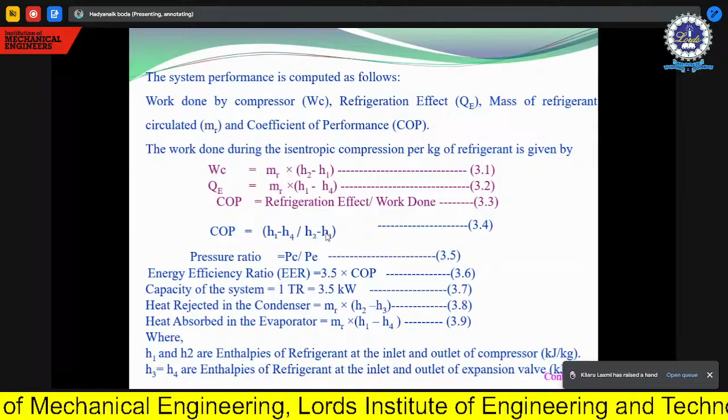And then the system computation, a very important role. As an engineer, the research in mechanical engineering definitely involves mathematical computation. You have to compute and analyze the parameters involved in the analysis.

And at the end you have to come to one idea, that suppose COP is reducing - what are the consequences of that closed cycle? If the refrigerant is not properly flowing through the system, our net refrigeration effect is not up to the mark, the work done by the compressor is high, and more power consumption is taking place.

So then you need to check that. Then the pressure ratio, the condenser pressure to the evaporator pressure, the parameters you can discuss. And also the system design consideration, how the system should be designed.

And then that previous chapter is related to the experimental analysis. Same thing - in simulation also we can give input parameters and analyze properties like pressure, density, volume, enthalpy. I have used cool pack simulation, where you can see the vapor compression system for simulation.

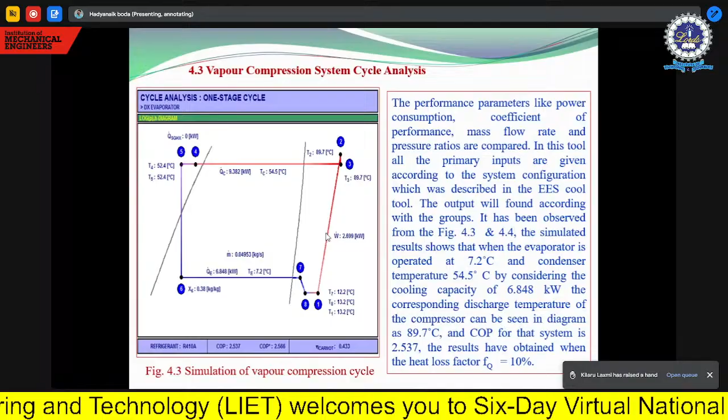Compared to experimentation, the simulation is less risky and low cost. In experimentation, you have to purchase material, fabricate, and run the experiment once, twice, or more than 10 times. So it's time involved and cost involved. So most students do simulation work instead.

If you see here the cyclic analysis of one stage cycle, if you give any input parameter - the mass flow rate I have given is 0.04953 kg per second, with operating condenser temperature of 54.5 and evaporator temperature of 7.2 degrees Celsius. So to maintain my evaporator temperature at 7.2 degrees Celsius with this mass flow rate, what is the cooling effect produced? I need to analyze the system performance.

So what is the operating temperature of the condenser? 54.5. With respect to that, the amount of heat rejected from the cycle, you can also compute. At the end you can see the coefficient of performance, COP, is 2.537. So for that given input parameters, the COP obtained is 2.537.

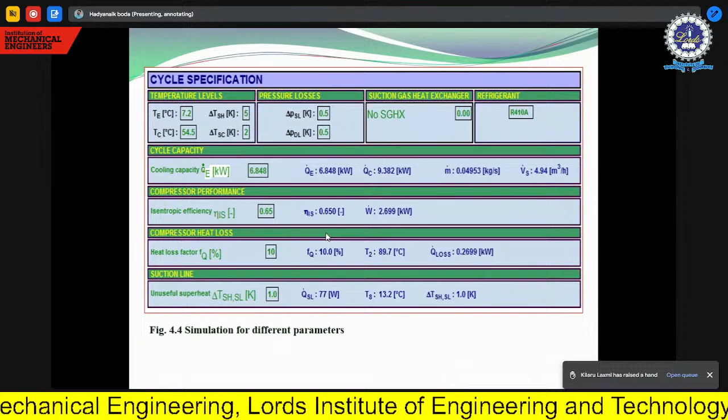So like that, the input parameters where you can see is TE 7.2 degrees Celsius, TC 54 point...

So I have given these two input parameters with the mass flow rate. You have to select the refrigerant here. This is a simulation tool, so whatever refrigerant you want, you can select, and whatever temperature range you can select.

Ultimately, it gives the coefficient of performance. For this, if you go for experimentation, as we have discussed, there is a lot of cost and time involved, so it is better to run the simulation. But we cannot say the simulation study gives 100% accuracy; sometimes experimental error would also be there, so we need to consider that.

So, analysis of compressor performance, and then the calorimeter test involving various components. Why? Because experimentation involves various components in this particular study.

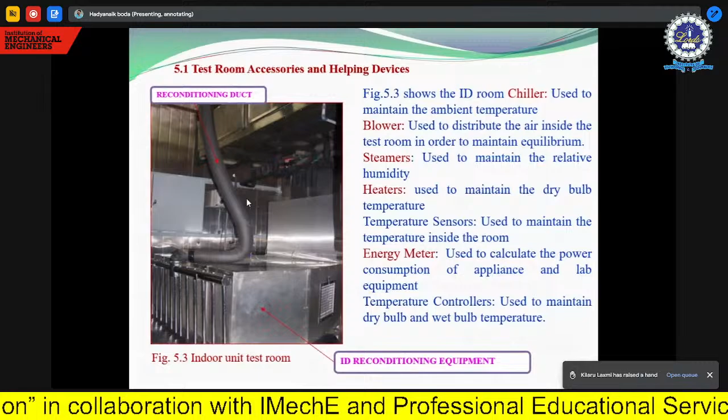Then measurements, and then results. Results and discussion plays a very important role, because you have run that vapor compression system both in simulation and experimentally. How those results are predicted and what is the trend of the plots needs to be shown.

Mostly the result and discussion section should be described with plots, graphs, and tables. You need to compare the various parameters in the table, and highlight those parameters in the form of graphs, showing the trend of the plot, whether increasing or decreasing, and explain that.

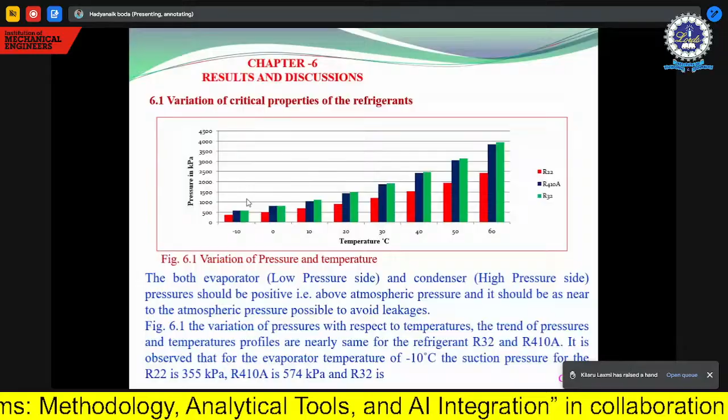So these are the various comparisons. We have already discussed that the results and discussion should have plots, tables, and graphs. So if we see here, in table one, these are the particular simulated results.

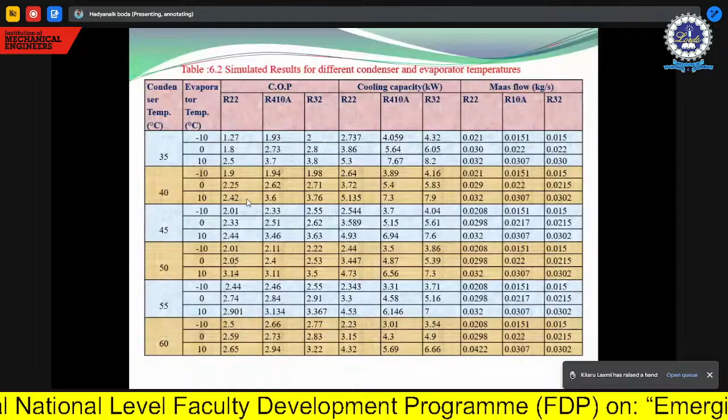We are comparing three types of refrigerant: R22, R410A, and R32. Then three cooling capacities in kilowatts, and again the mass flow rate. With respect to mass flow rate, how the cooling capacity is varying for those three selected refrigerants, and also the performance of those three selected refrigerants, and the variation of refrigerant effect with mass flow rate. This is how you need to explain and draw the results and discussion chapter.

So next, I'll skip too many of these PPTs.

So at the end, you can see chapter 7, conclusions and scope for future work. Concluding remarks: the following conclusions have been drawn after comparison of both the simulated and experimental results. What is the first conclusion? R32 is the most balanced solution, not depleting the ozone layer. Like that, you have to mention. The second one is that an ideal refrigerant should have a high latent heat of vaporization. Like that, based on the objectives you have fixed, you have to draw the conclusion.

So at the end, what I can say is: identification of objective, fixing goals, and drawing conclusions. Thank you very much, Madhukar.